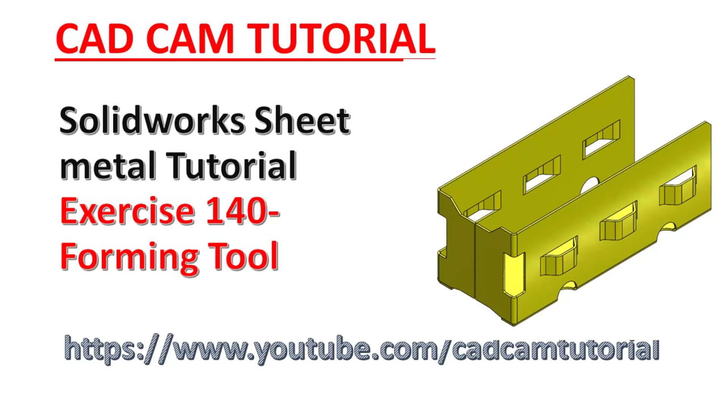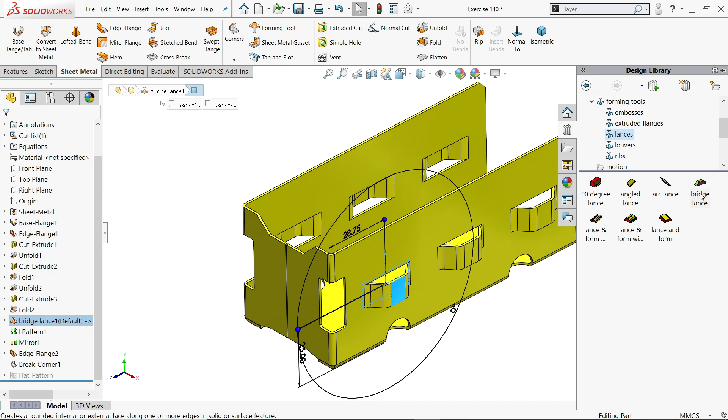Here we will learn some basic sheet metal commands like base flange, then we will see edge flange, then we will see how to use the fold and unfold tool, and we will also learn how to use forming tools. In the design library there are forming tools; we will see how to use this bridge lance to create this shape. Look, we will use a forming tool to create this bridge lance.

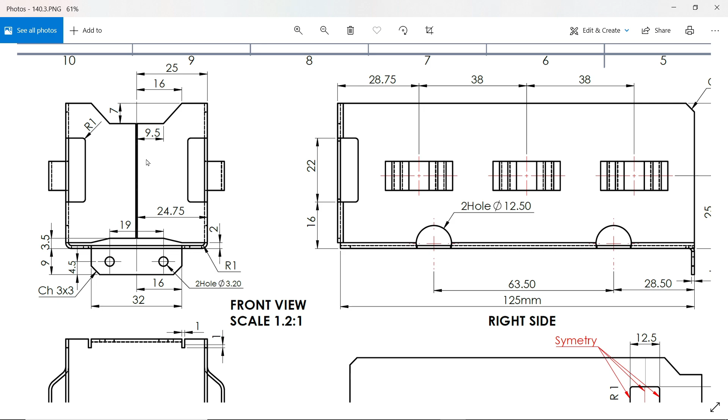Now in this exercise we are going to start with the front view. See, this is our front view. Now let's check the note first. All dimensions in millimeters, thickness 1 millimeter, inside radius is 1 millimeter. Now we will do the half portion and later we will mirror the half portion.

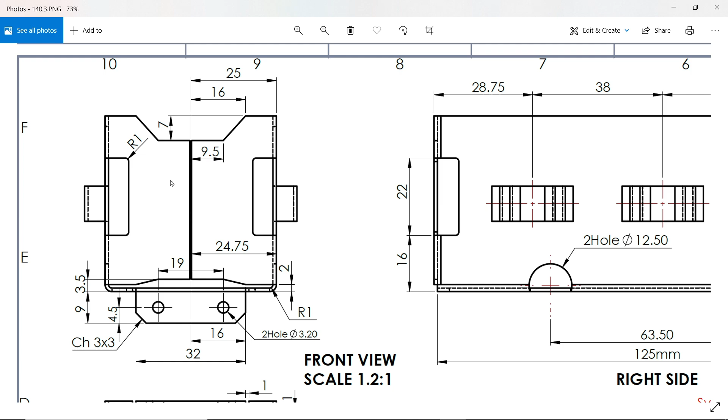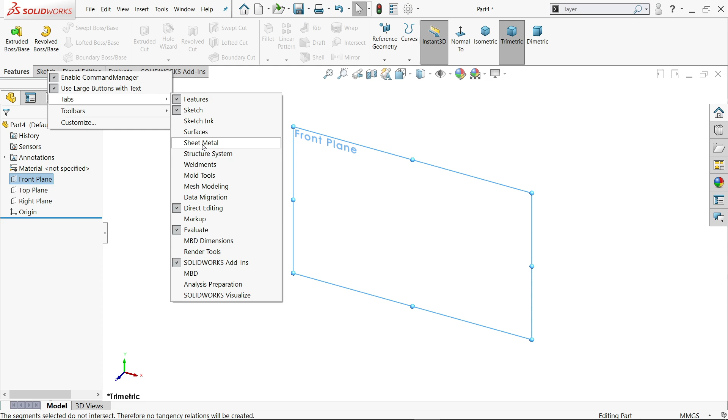So here width 25, half width, and if you check, the height is 50 millimeter, and how long we need to extrude, see, overall length 125 millimeter. So first, at the right bottom, check the unit, it is millimeter. So let's start. Before starting, right click on tabs, go to tabs and here choose sheet metal. That's it. Now click front plane, sketch.

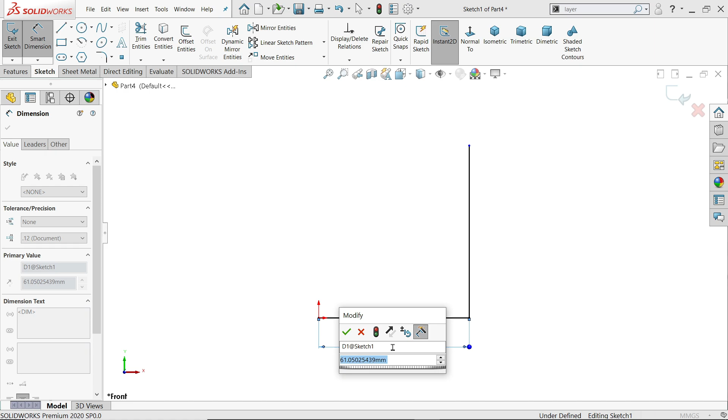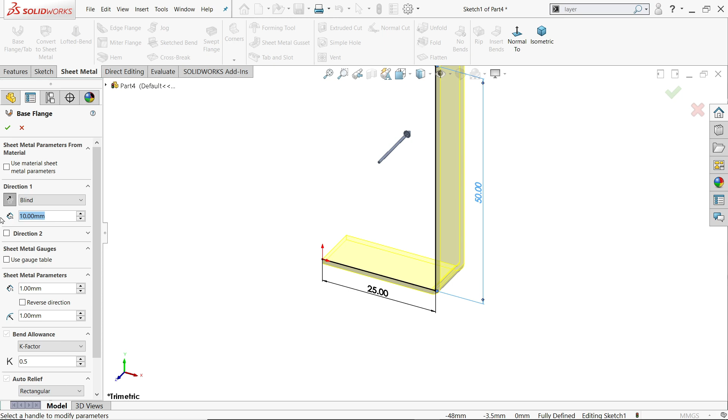Now activate the line tool. Draw an L shape, right click, or press escape key to exit. Activate smart dimension. This length 25 millimeter, height 50 millimeter. Okay. Now go to sheet metal and activate base flange tab. Now look, this is going this direction. Let's reverse direction. So here, direction 1 end condition, reverse. Length 125. Look, isometric.

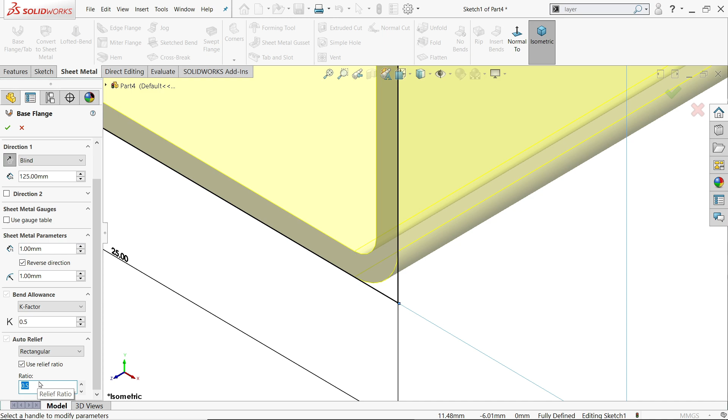But see, it is going outside. So here you will see sheet metal parameters. Thickness 1 millimeter, reverse direction, see it goes inside, and the bend radius, inside radius 1 millimeter. Bend allowance K factor we will keep as it is, and relief hole, it is mentioned in the drawing, so let's keep as it is. Look.

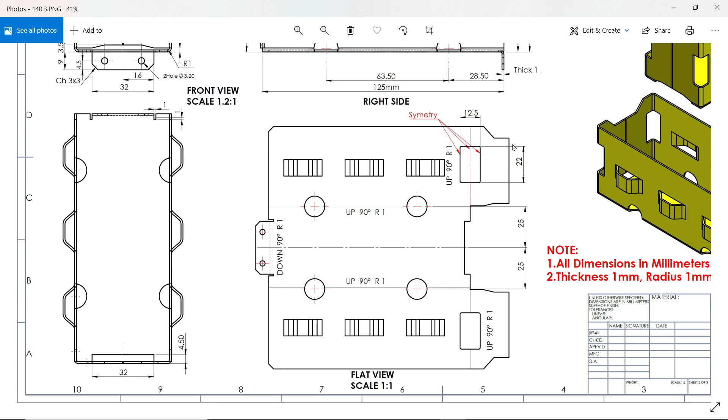Now here you will see one more flange. Let's check, this is the flatten view, so this portion we need to make. This portion, here is written 24.75 from this end. And here the gap from bottom is 2 millimeter. 24.75, 2 millimeter gap.

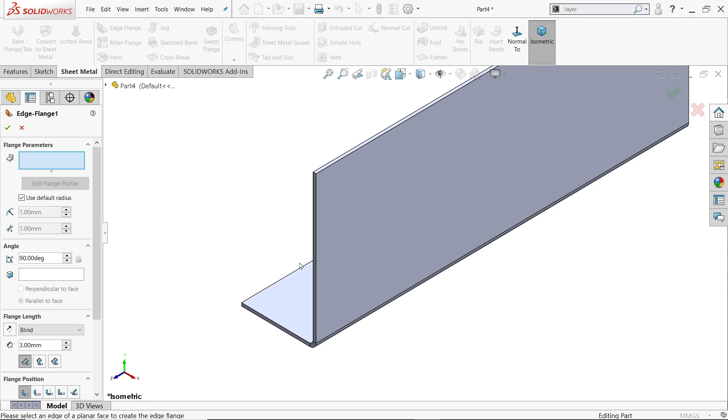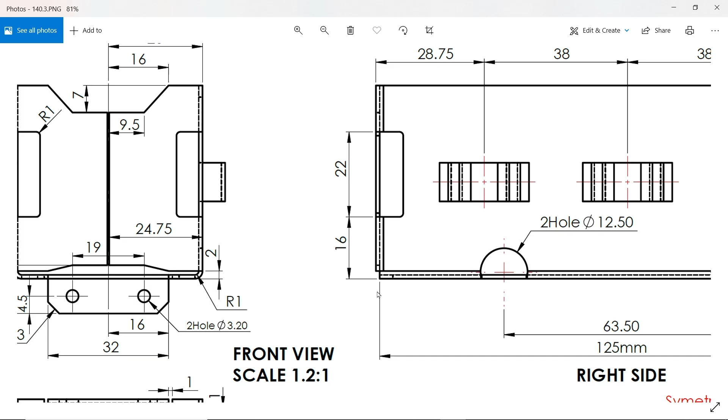So I'll activate edge flange. I'm going to choose this one. Drag your mouse inside, click somewhere near here, come down, use default radius and thickness, 24.75. Material is outside, you will see the length distance from this corner, but there is material outside. So similarly we will keep material outside. We don't need any relief here, so let's keep as it is. Say okay. Look.

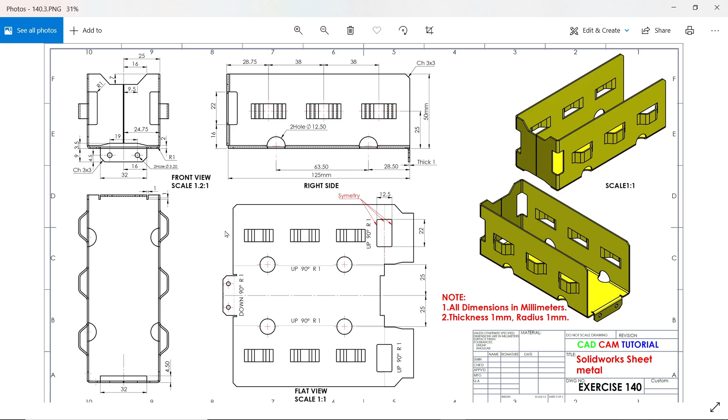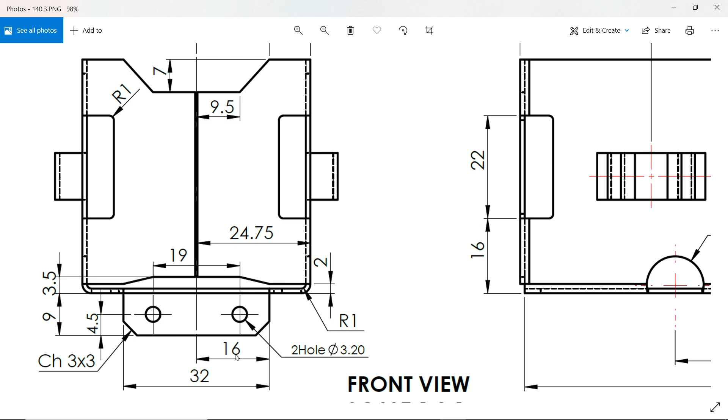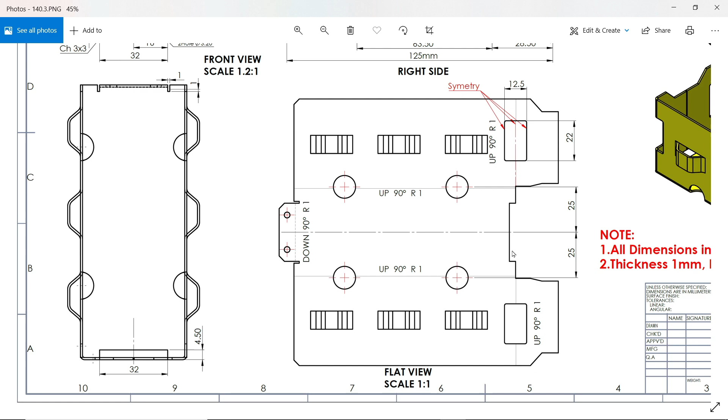Now let's make these cutouts. 16, 7, 9.5 from center line. See, this is the center line. At bottom the same, 19 by 2, it's 9.5. Height 3.5, and there is one taper height also 2 millimeter, and 16 millimeter this height, and this is going to cut. If you check, see there is a cutout 4.5 inside. So here also you will see this cutout easily, see this portion. So we will see how to make this.

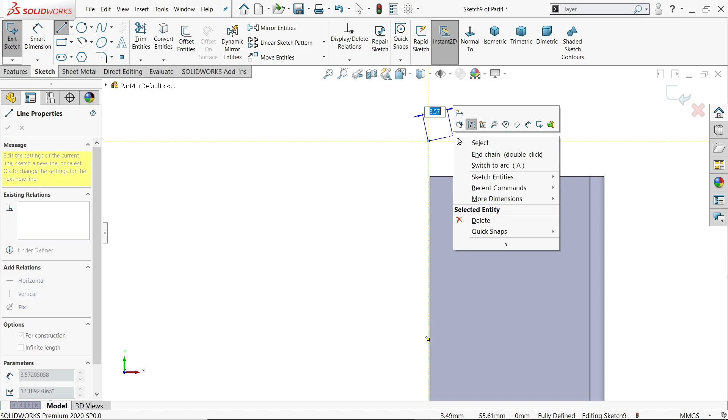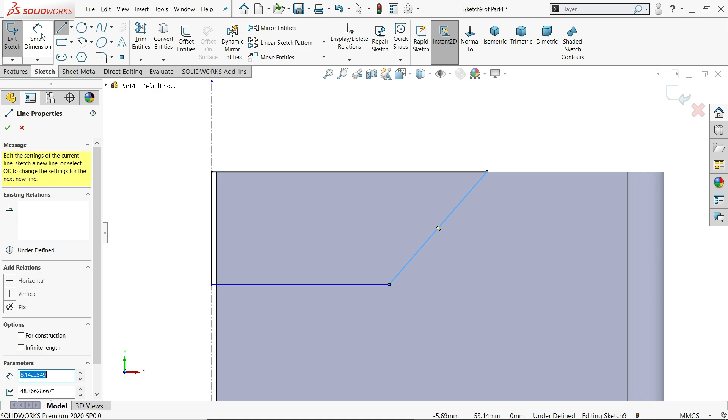Click sketch. First activate center line and draw one center line. See, this is a little out from this. So this is the origin point, just draw a line. Click the line and check it is vertical. That's it. Activate line tool and let's start from somewhere here. Activate smart dimension and let's define the dimensions. 16 millimeter, this one 7 millimeter and this one 9.5 millimeter.

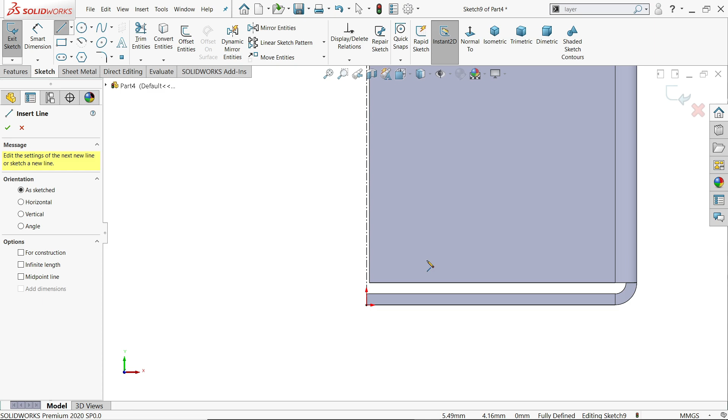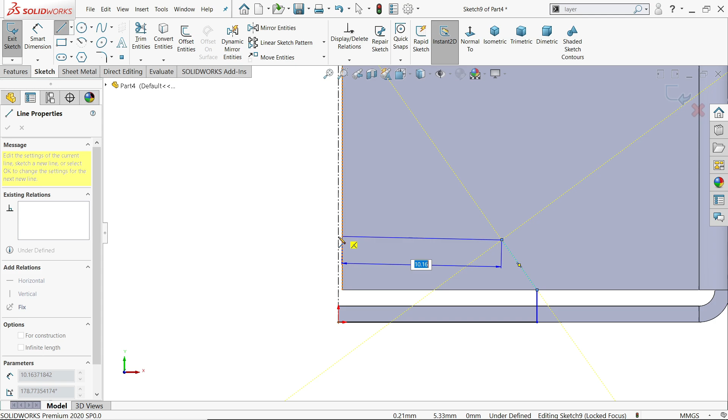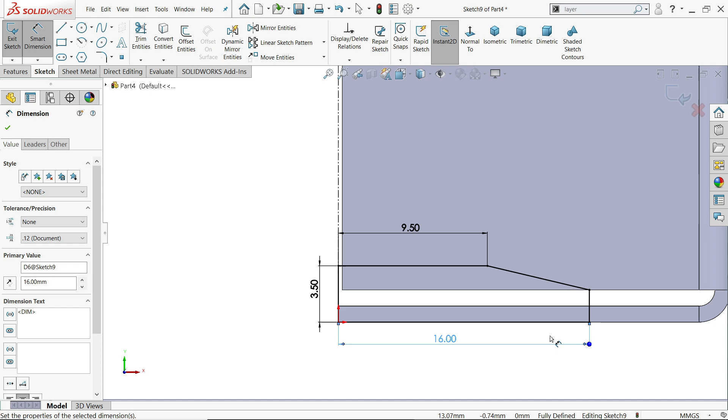Now again activate line tool, come down. Now I'm going to start from this origin point to somewhere like here, then this point, something taper like this. Oh no, this is a vertical line. Again activate line up to this line and connect the origin point and close the geometry. Smart dimension, this is 19 by 2, it's 9.5, 3.5, and the bottom one is 16, and if you check, this is by default 2.

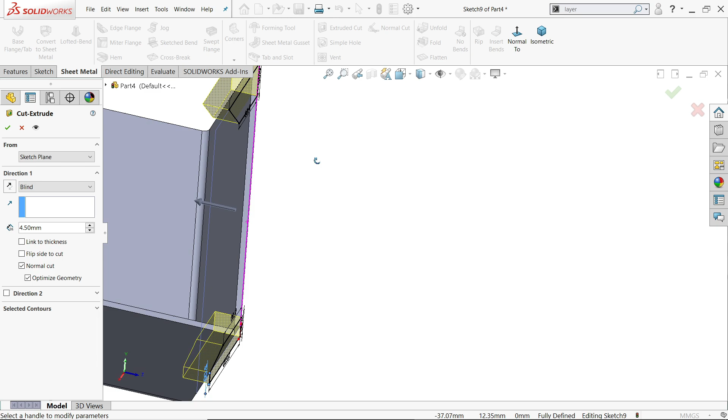Okay, now this is going to cut, so go to sheet metal and here the option extruded cut. End condition keep blind, uncheck link to thickness and depth 4.5 millimeter. Look how this is going to cut. Let's check the flatten view. Look.

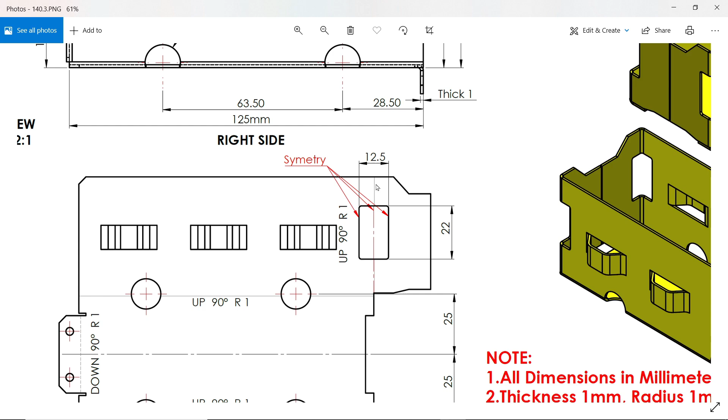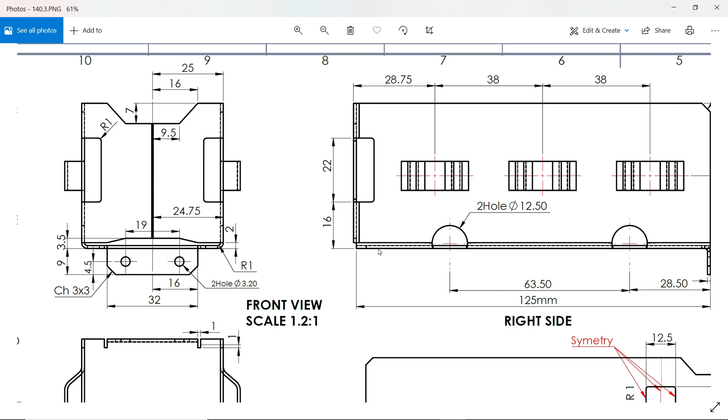Now let's make some cutouts like this cutout, 12.5 by 22. Distance from this end, there is a flange, so opposite of the flange, 22 is the length, 16 from bottom, and here you will see symmetry. This is the origin point. This corner point is actually the origin, so symmetric about this, and you will see here radius R1.

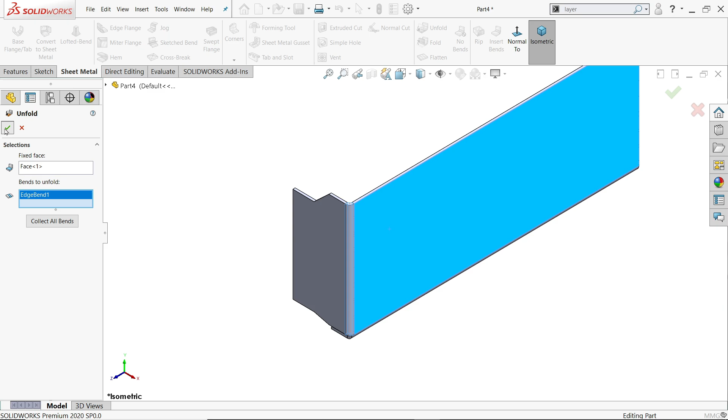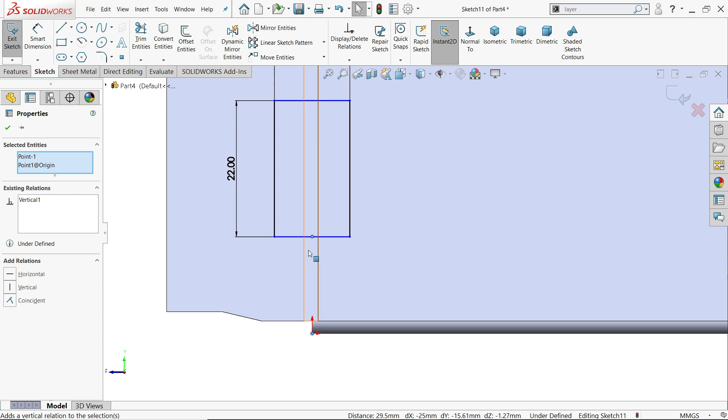So first we will unfold, so choose the unfold tool, make this one the fixed face, bend, I'll choose this one, say okay. See, this is flat, only the one we need. Select this face, sketch, activate corner rectangle. Now 22, tab, 12.5, enter. Okay, now find the center point. This is the center point of this rectangle, hold shift, origin point, vertical. See, this comes in one line. Now distance 16.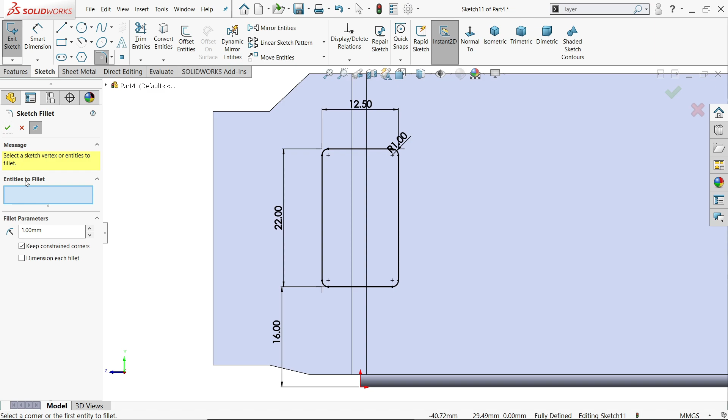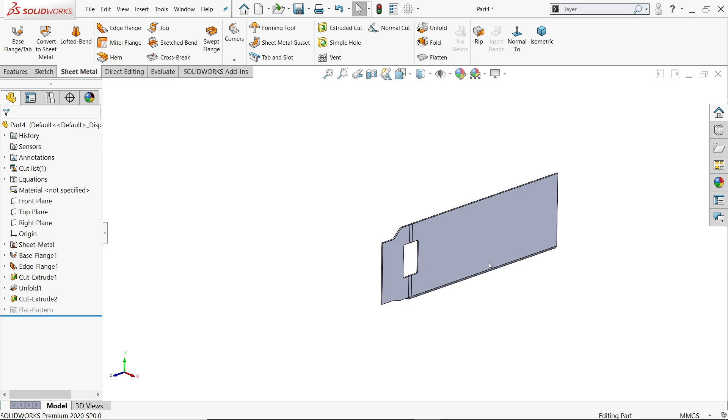This is fully defined. Activate sketch fillet 1 millimeter and select the whole rectangle. Say yes. Okay, now the rectangle is confirmed. Now go to sheet metal, activate extruded cut. Here end condition, click link to thickness because we want to cut only up to thickness. No need to define the depth. Now let's go to the previous position. So click fold. If you choose fold, the fixed face is already selected. Bend, this is the bend, choose. Okay, look.

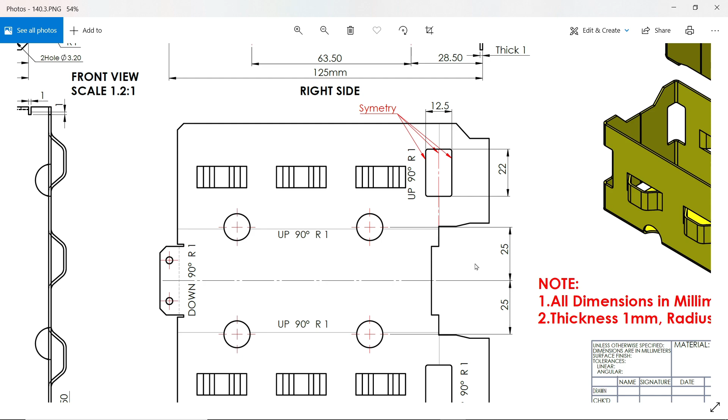Now let's move to the next. Next we are going to make a hole. You will see at center there are 4 holes, 25 millimeter away from the center line. Center line means we are going to make half. See, distance between these two 63.5, from this end 28.5, 12.5 is the diameter.

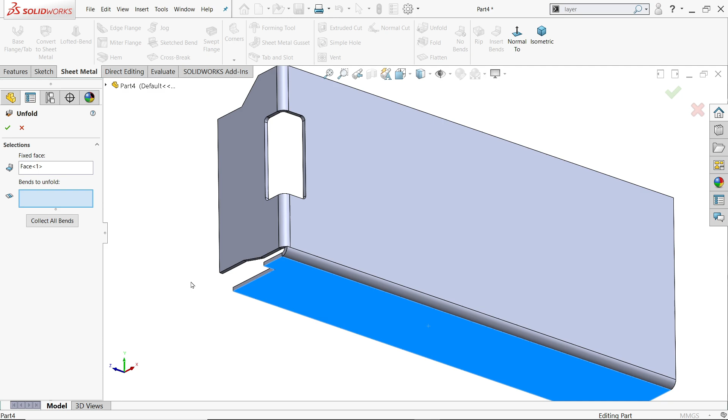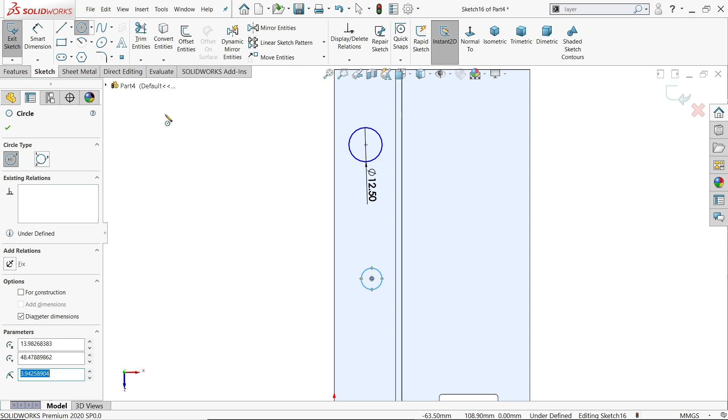So let's unfold, and this time I am going to choose this as a base, and here collect all bends, no need to define one by one, say all. See, now our hole is going to be made at this point. So click this, sketch, circle. Now the first hole is 12.5, enter, enter. Escape key to get out.

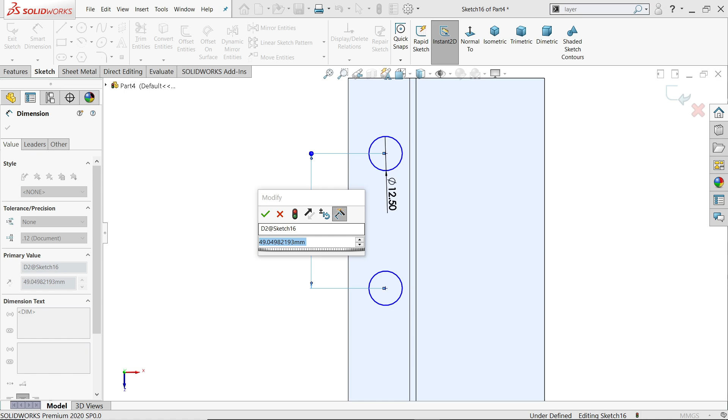Now hold shift key, equal hole. One more thing to define: select both the points, hold shift key, vertical. Activate smart dimension. First these two centers, 63.5. Now from here to this point 28.5, and distance from this corner is 25. This is a fully defined sketch.

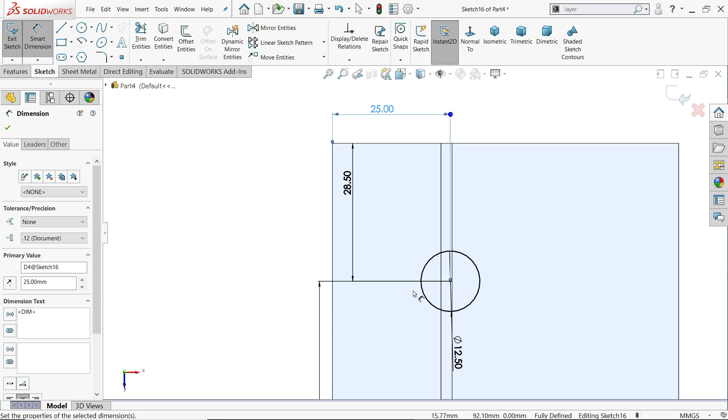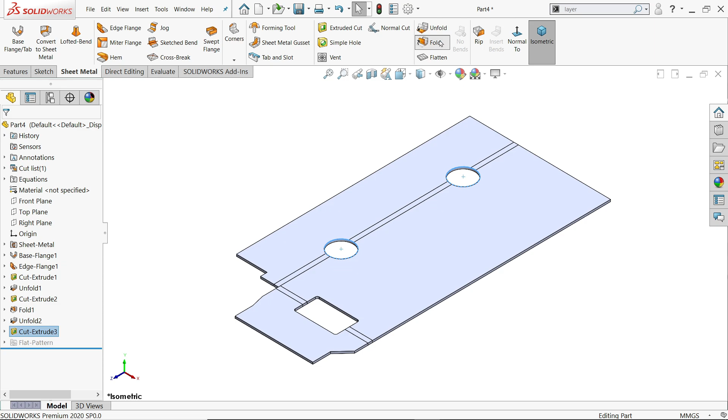Go to sheet metal, extrude cut, end condition keep blind and check thickness, so that we will cut only up to the thickness. Say yes. Look. Now what we will do? Fold. Base selected, collect all bends. Okay. Look.

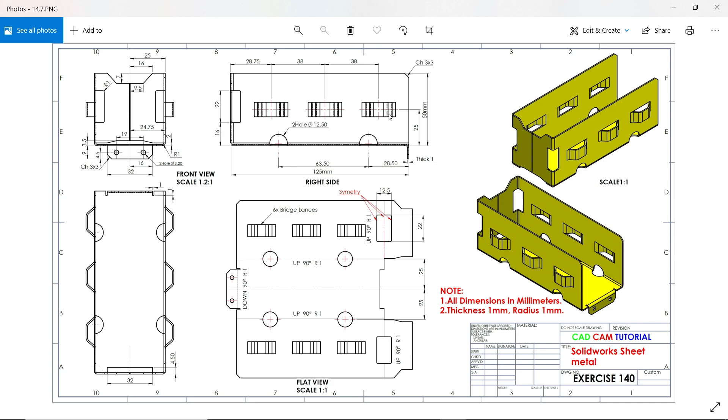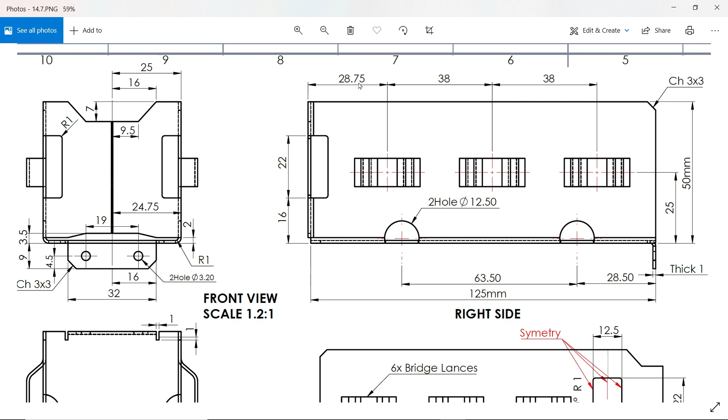Now here the next thing is bridge lances. See, there are 6 lances, 6 bridges, and this is a forming tool. You will see here in the side view this shape, and this distance 38. Okay, this is the center distance, but from this side, from the outer of the thickness, 28.75, and from the bottom it's 25.

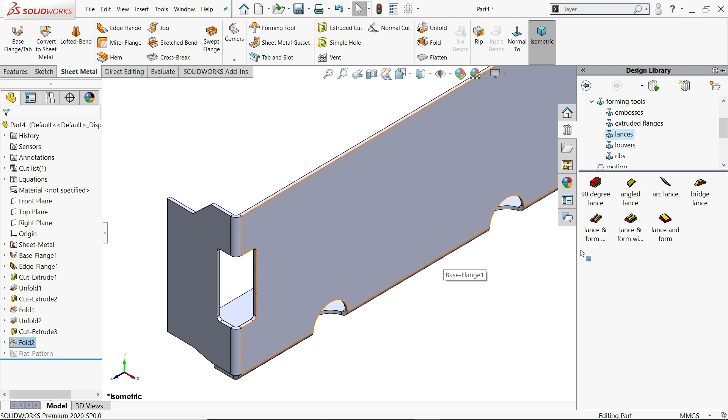So go to design library, and here you will find forming tools. In forming tools you will find lances, bridge lances. So just drag bridge lances to this face and leave. Now if you rotate the mouse with the scroll, you will see this is going inside. So flip tool, position.

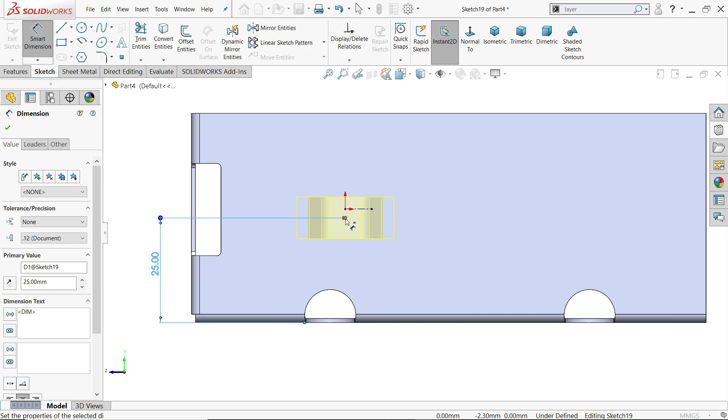Activate smart dimension. Now from the bottom edge it's 25. Okay. Now from this outer edge it's 28.75. Say okay. Okay. Now look.

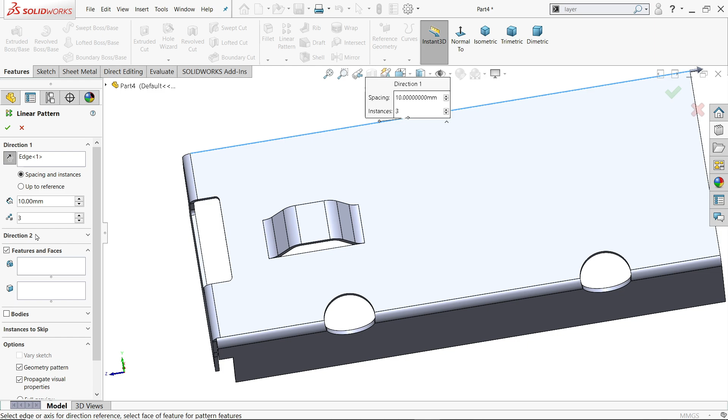Now let's make 3 of these. So features, linear pattern, direction, I am going to choose this straight line. This is going to be our direction. Now feature, this one, 3 instances, and the gap between them is 38. You will see. Look, the 3 lances are created. Further we will mirror it.

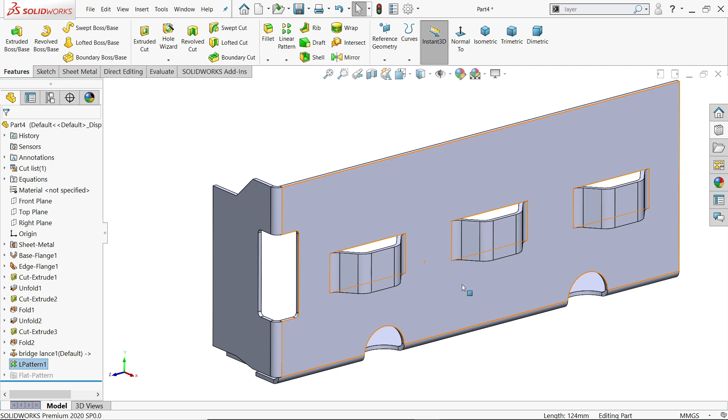Now this is the body what we need. Now let's mirror this body. Click mirror. Now face, so I am going to choose this face. Clear features, we are going to directly choose body, mirror the body. See, merge solid, say okay. Now look.

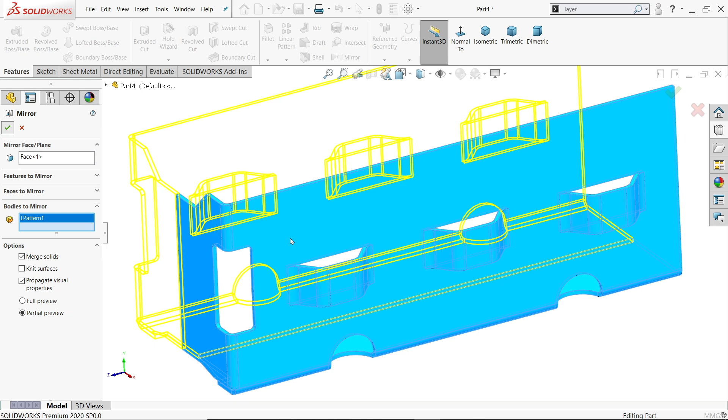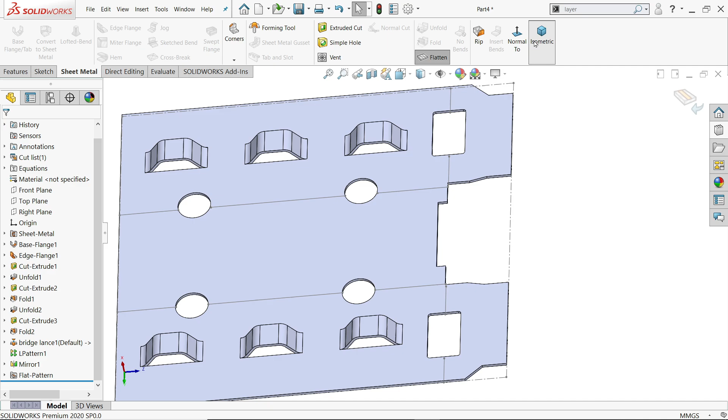Let's go to sheet metal and activate flatten. Now look, this is how we made it. This is according to our drawing. If you check, okay, like this. See, holes, lances and everything. Now everything is almost created.

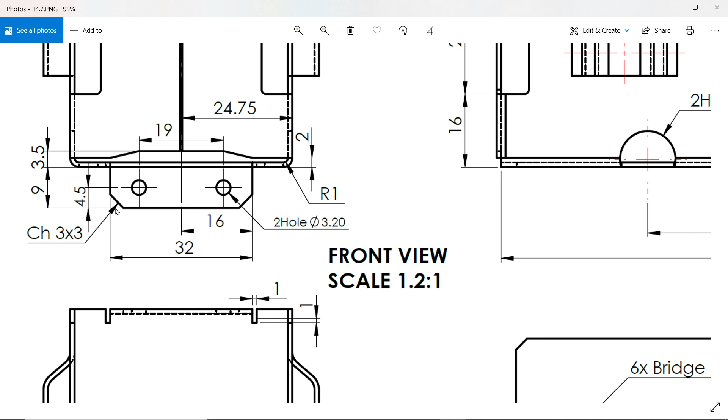Now the bottom, see, on the opposite side, this is the rectangle going 32, 9 millimeter from the bottom edge. There are 2 holes, 3.2, and center distance 19, and distance from bottom 4.5. There is a chamfer, 3 by 3 chamfer, and at this corner also there is a chamfer 3 by 3. So that's it. This is the last thing which we need to make.

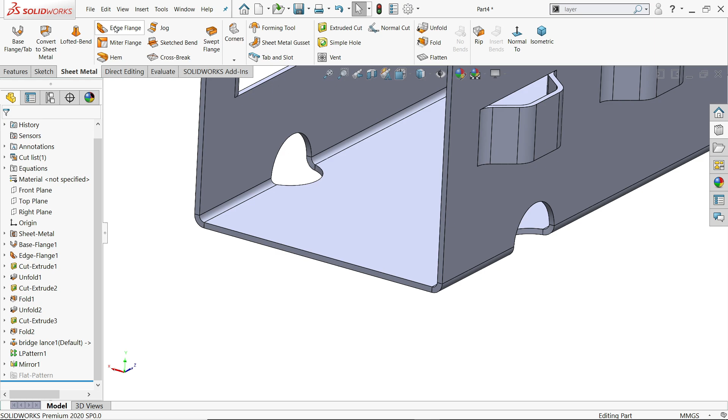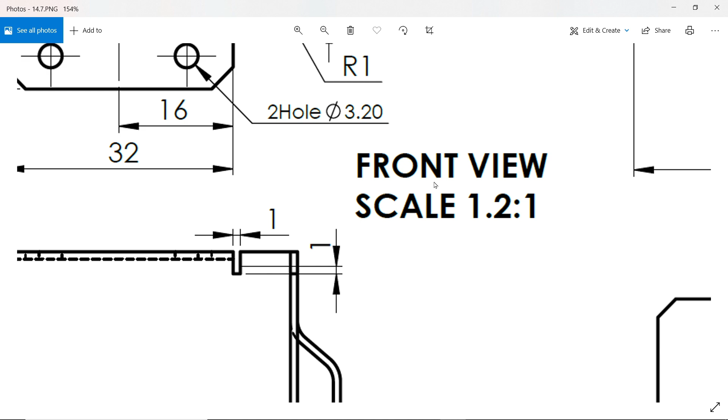So rotate, activate edge flange, click bottom edge, down, and this is inside. Now if you check here, see, 1 millimeter thickness inside. And one more thing, if you see the front view, this is the ratio 1 by 1. So first we need to make the shape. So click edit flange profile, look, drag.

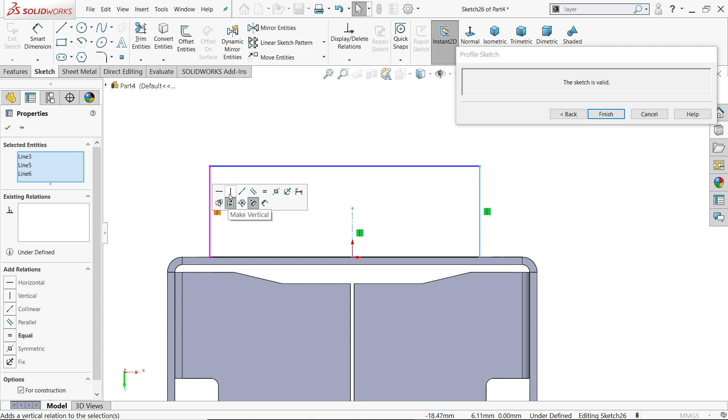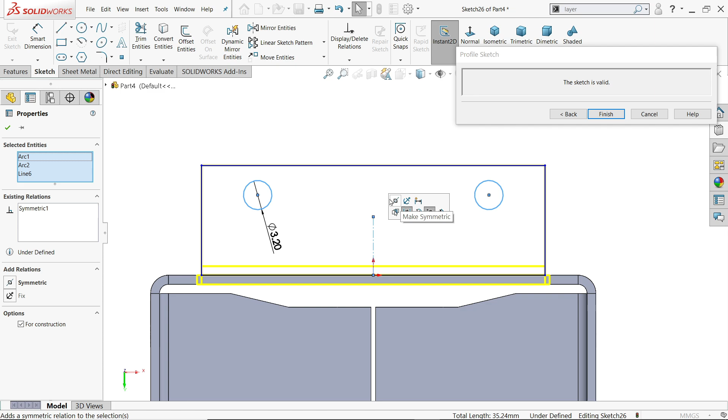Activate center line and draw one construction line. Now select these 3 lines along with the construction line, make relation symmetric. That's it. Activate circle tool, 3.2, enter. Now hold shift key, select both the circles and this line, symmetric relation. See, if you choose symmetric it means it's equal.

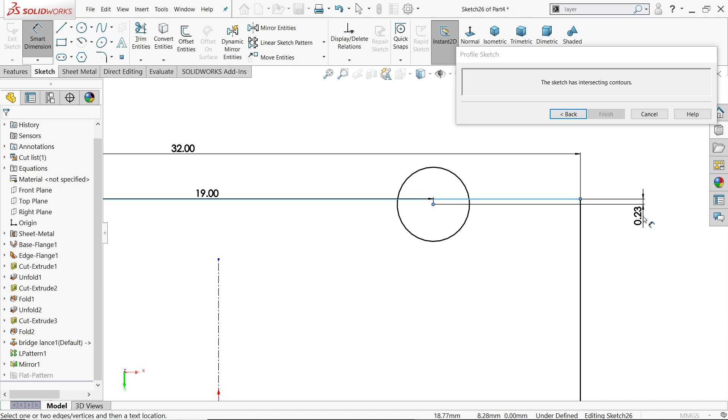Let's make first the outer dimension 32, inner 19, from inside or from outside of the thickness 9, from here to this line it's 4.5. See, this is a fully defined sketch. Go back and okay.

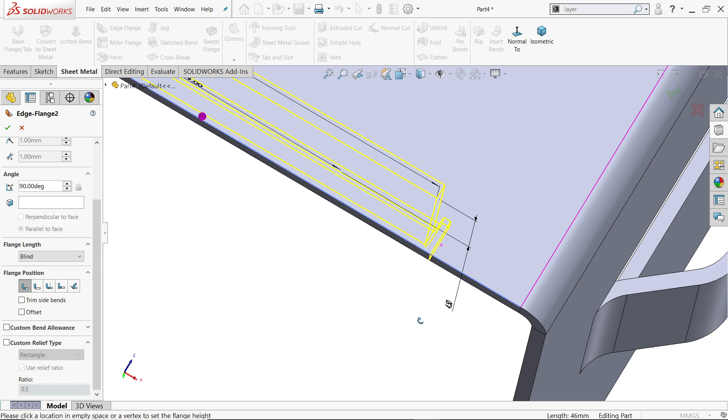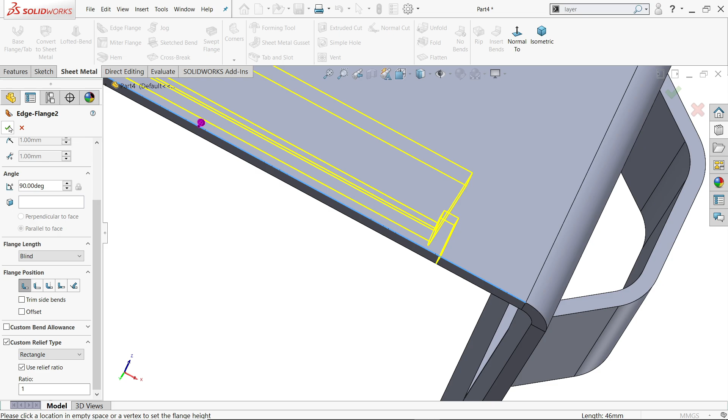Now here we don't need to change anything. Material thickness inside. If we choose inside, you will see a little slit here, and this is called custom relief type. It's rectangle, and this is 1 by 1, right? So I'll choose unchecked. Here write 1:1, or if we choose use relief ratio, directly write 1. Both things are the same. Say okay. Look, thickness inside, radius always by default what we took at the start.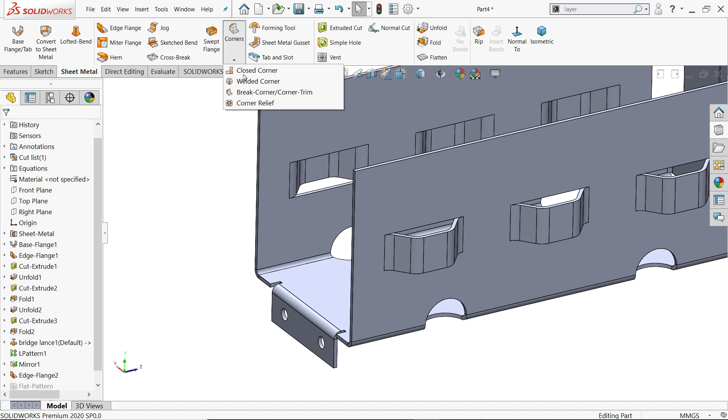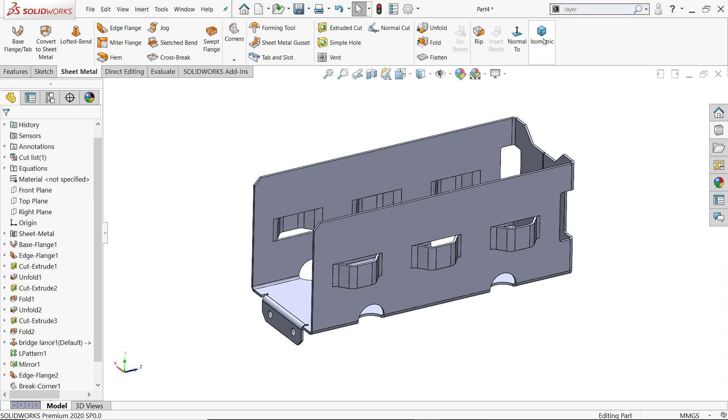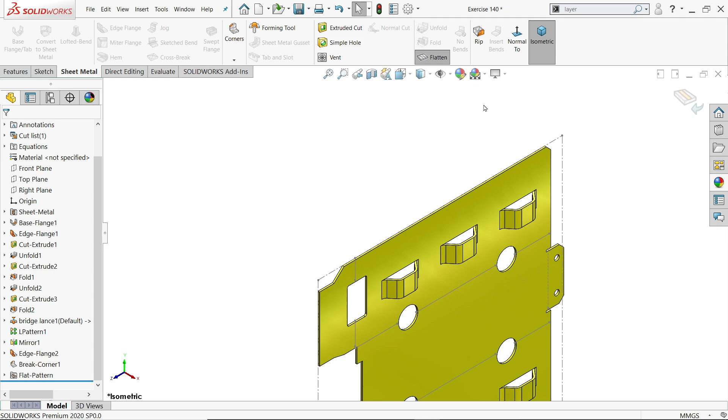Now click here corners, break corners. First is chamfer 3. Let me choose this corner, this corner, this corner and this corner. Say yes. Look, isometric view. Let's save this one, exercise 140. Click flatten view. Okay, select this face, normal view and look.

See, this is how we use different tools and create this simple exercise in SolidWorks sheet metal.